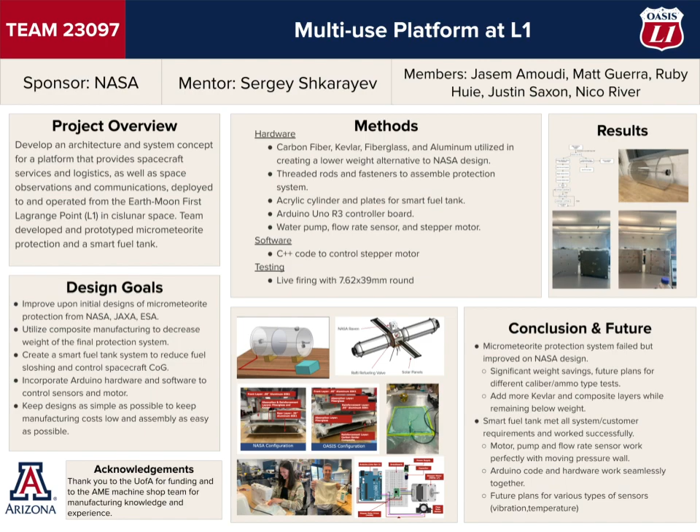Our project focuses on developing an on-orbit refueling station located at the Earth-Moon First Lagrange point, intending to extend the range of interplanetary spacecraft. The station is designed to carry hydrazine and dinitrogen tetroxide to refuel spacecraft mid-mission. The Oasis station is deployable in a singular launch aboard the NASA SLS rocket and is designed for an operational lifespan of 10 years. Oasis will be powered by dual solar arrays, supplying 10 kilowatts of power for the basic operational needs of the unmanned station.

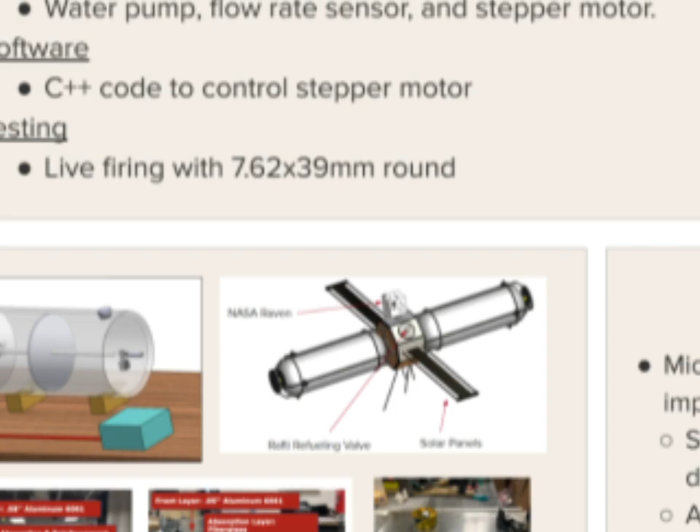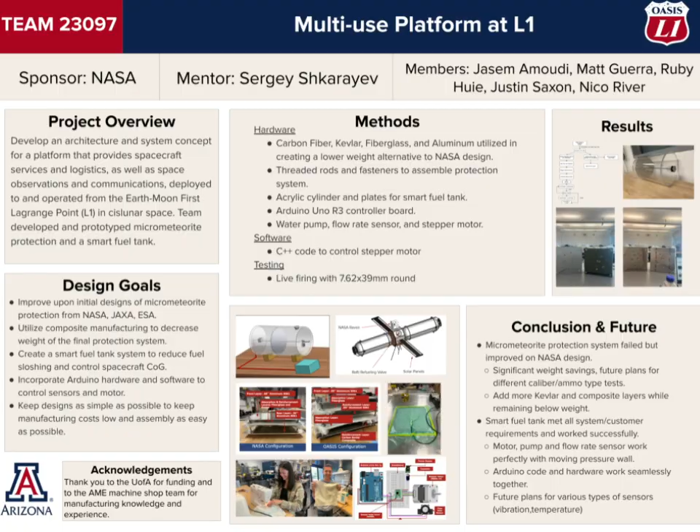Key mission challenges our team identified were the threat of micrometeorites to the fuel tanks, as well as maintaining propellant pressure and station attitude control as the tanks are emptied during fuel transfer. To combat these threats, we prototyped a micrometeorite protection system, improving upon previous NASA designs, and designed an autonomous smart fuel tank to control propellant pressure and create a constant axial moment of inertia even as fuel levels change.

We will next take a closer look at the system requirements for the micrometeorite protection. These requirements can be broken down into 6 categories.

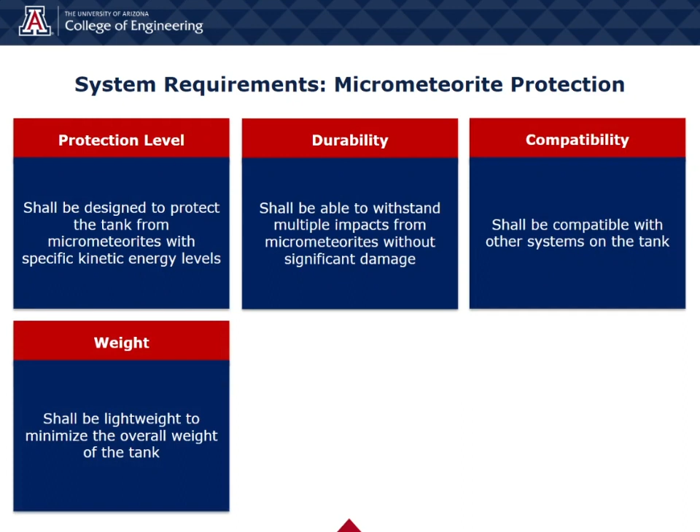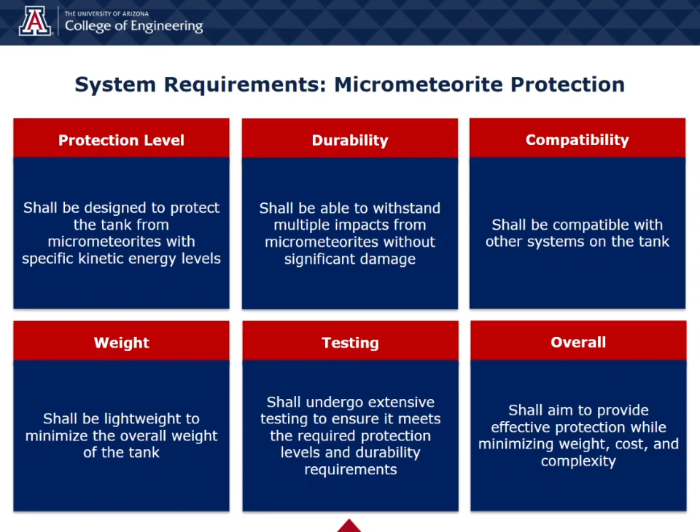The design shall be able to withstand micrometeorite impacts while remaining durable enough to withstand future impacts. The design shall also be compatible with other systems on the tank while remaining lightweight. Thorough testing of the various designs shall also be done to ensure the layers meet our protection and durability requirements. When combined, these different requirements will hopefully lead to an effective protection system while minimizing weight, cost, and complexity.

The system architecture for the micrometeorite protection system was composed of a NASA configuration and our own Oasis configuration. The NASA configuration was composed of a front wall, followed by 2 different types of fabric, and then finally a rear wall. For our design, we had a front wall, a layer of fabric, another wall, another layer of fabric, and then finally a composite rear wall.

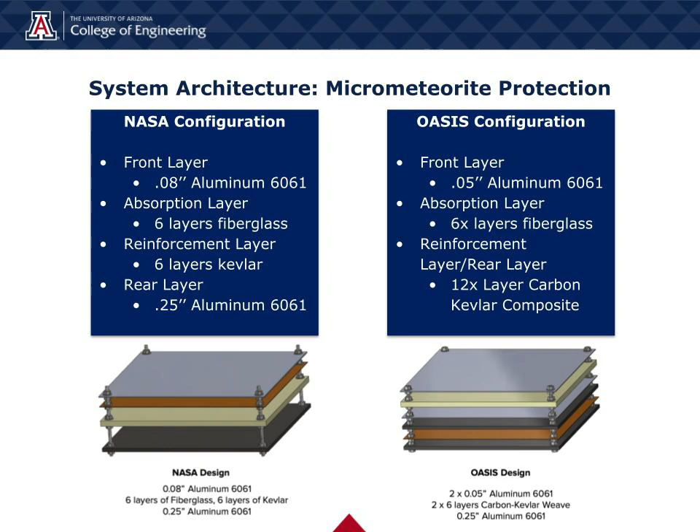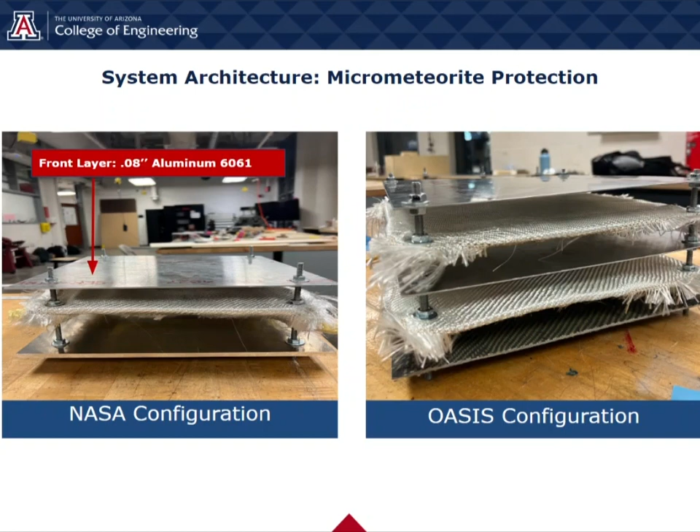Looking in more detail, on the left is our NASA configuration, where the front layer was composed of a 0.08-inch aluminum 6061 alloy, followed by an absorption and reinforcement layer composed of fiberglass and Kevlar, and then finally a rear layer of 1/4-inch aluminum 6061.

For our Oasis configuration, it was very similar, but we used 0.05-inch aluminum for the front wall, followed by 6 layers of fiberglass, another reinforcement layer of 0.05-inch aluminum, followed by another 6 layers of fiberglass, and then finally a reinforcement layer composed of a carbon Kevlar weave.

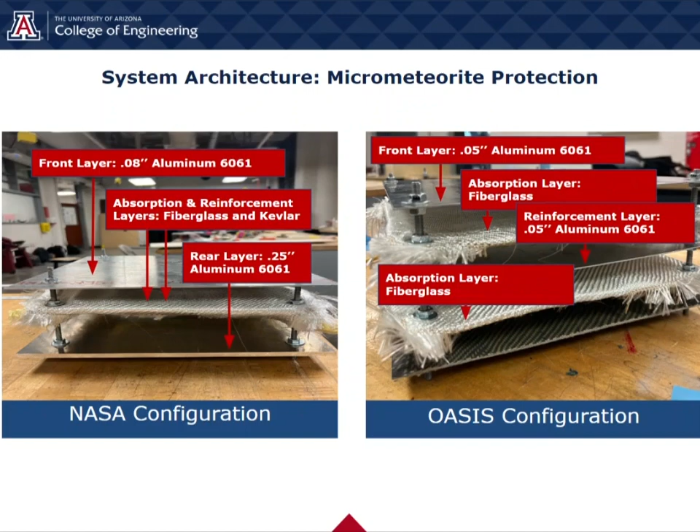To create our configurations, we utilized basic machining techniques on our metal components, and for our material components, we sewed and grommeted the layers after cutting them to size.

The most time-consuming and complex part of the process came from the creation of our carbon Kevlar composite. It was composed of 12 separate layers that were individually saturated with a high-quality epoxy resin. The layers were then stacked together and left to cure for 36 hours inside a vacuum bag, which removed any excess air bubbles present throughout the different layers.

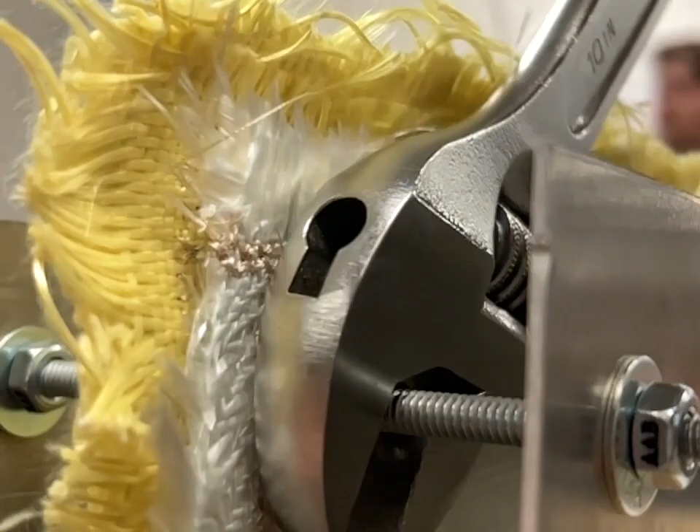After the curing process was complete, we were left with a strong and durable layer that we could add to our protection system. After this was done, we were able to assemble the layers by utilizing threaded rods and a combination of nuts and washers to hold the layers at a desired distance from each other.

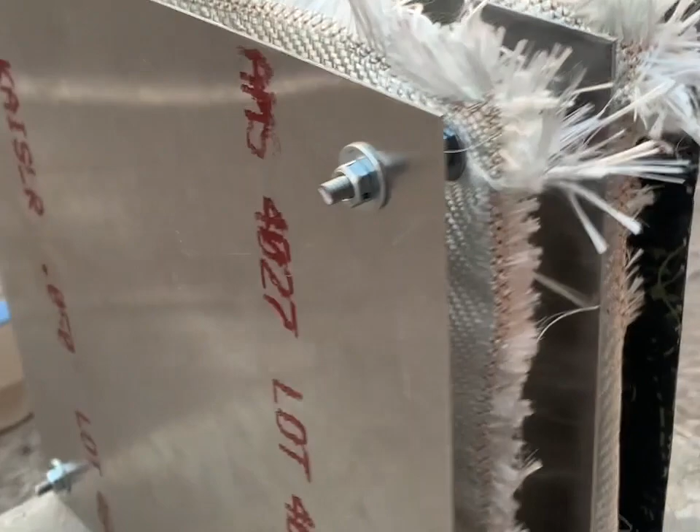The first sample to be shot was our own design. It was shot with 5 7.62 by 39mm bullets at 1900 feet per second and generated a minimal amount of debris. Tracking a piece of debris and measuring the distance it traveled over a certain number of frames allowed us to calculate its velocity. In this case, it was traveling at 12.3 feet per second.

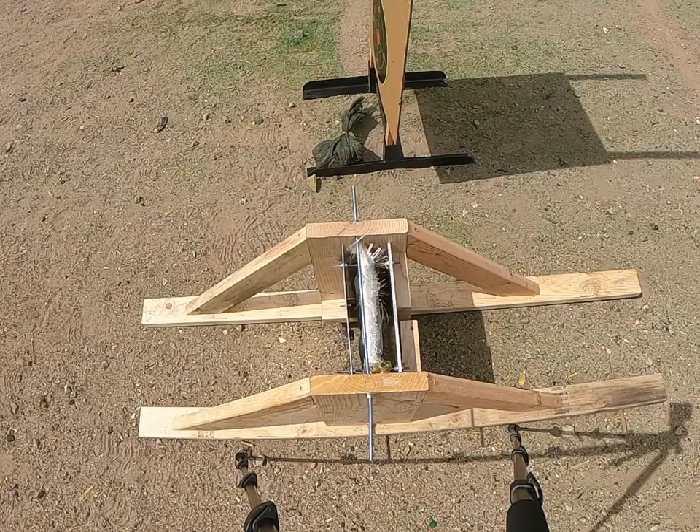Now looking at the NASA design, you can see a lot more debris is being generated. Part of this could be due to the wood being weaker after having been shot, but it is likely due to higher energy in the bullet after going through the layers. Doing the same analysis on the debris generated gave a particle velocity of 16 feet per second, which is 30% higher than in the Oasis design. This leads to the conclusion that despite the layers not stopping the bullet, the Oasis design was better.

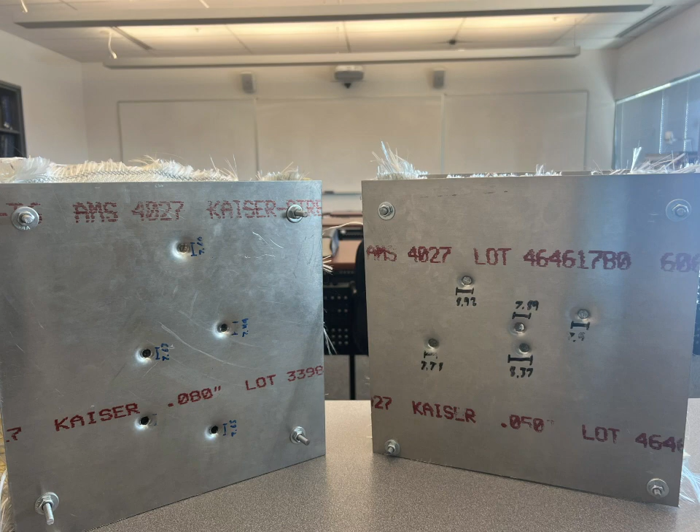The aftermath of our prototype testing can be seen in these images. We're next going to talk about where we went wrong with our prototype testing.

The main issue with our testing is the type of bullet we decided to use. We decided to use a 7.62 by 39mm full metal jacket round, which was chosen because it has a similar amount of energy to a micrometeorite impact. This is a poor choice, however, because it is designed for penetration and does not shatter on impact. For future testing, the use of frangible bullets would have been a better choice, as they are designed to shatter upon impact, more closely emulating what a micrometeorite collision looks like.

Testing our samples in this way would have led to the bullets being completely stopped by our various layers, and allowed us to examine how our configurations actually worked and allowed for a better comparison of the two designs.

Through thorough testing and analysis, we were able to come to three conclusions. First, the Oasis configuration was 30% more energy effective and 40% more weight effective than the NASA configuration. Second, neither configuration provided sufficient protection against high-velocity rounds designed specifically to penetrate through objects. Third, future considerations will take into account the designated uses behind specific types of munitions and more closely try to replicate the types of impacts that micrometeorites have, in order to optimize future configurations.

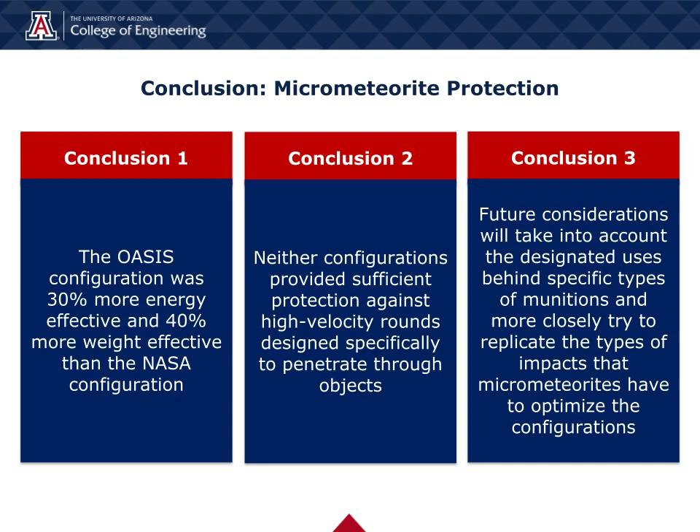The system requirements for the smart tank can be broken down into five categories. Sensors shall be used to monitor different properties of the fuel, which shall provide guidance for how to move the wall, reducing fuel sloshing and maintaining a constant density.

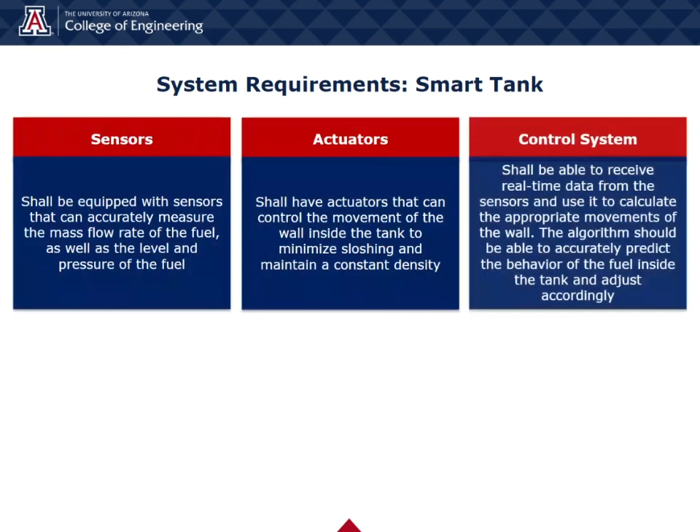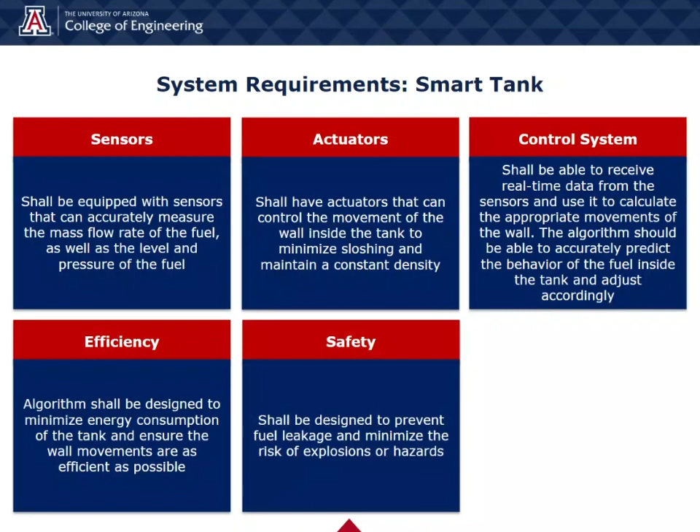The control system that is developed shall be able to accurately predict the behavior of the fuel inside the tank while minimizing energy consumption. It shall also be able to monitor different safety parameters surrounding the tank. Combined, these requirements should lead to a successful tank design.

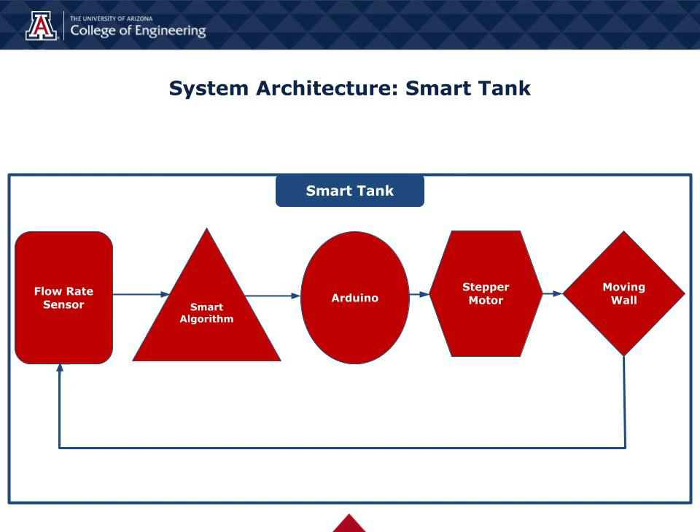The system architecture of the smart tank is as follows. A flow rate sensor sends information about how much water is leaving the tank to a smart algorithm, which can then tell the Arduino how far the wall needs to move. This then tells the stepper motor how long to spin until the moving wall hits the desired distance.

Let's briefly describe the hardware associated with our smart fuel tank design. It starts with the Arduino Uno R3. We also have a stepper motor driver, a flow rate sensor, a NEMA 17 stepper motor, a capacitor, a power supply, and a breadboard.

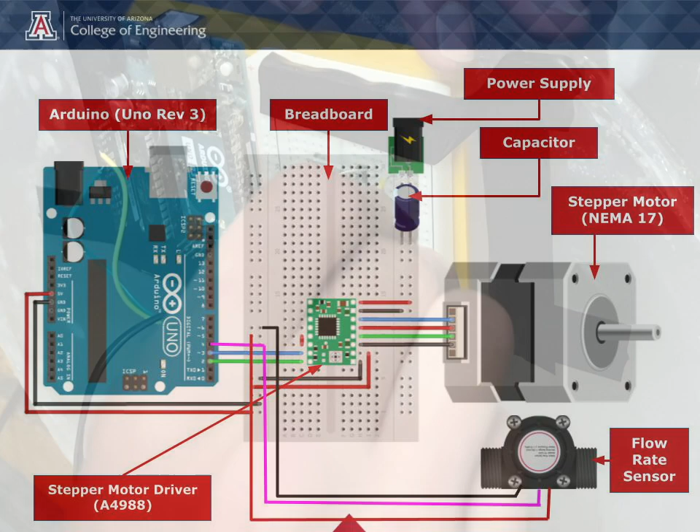When the motor steps, it suddenly demands a lot of current, which can cause the voltage for the Arduino to drop. The capacitor provides a local reservoir of power that can store and supply energy for this demand spike. The stepper motor driver converts pulse signals from the controller into motor motion to achieve precise positioning. A breadboard is an easy way of prototyping a circuit without having to solder everything together.

This will be a brief description of our software through a software block diagram. Like any software development task, all the magic happens within the IDE. This is where the main body of the function is programmed in C++. We then connect our personal computer to the Arduino Uno R3.

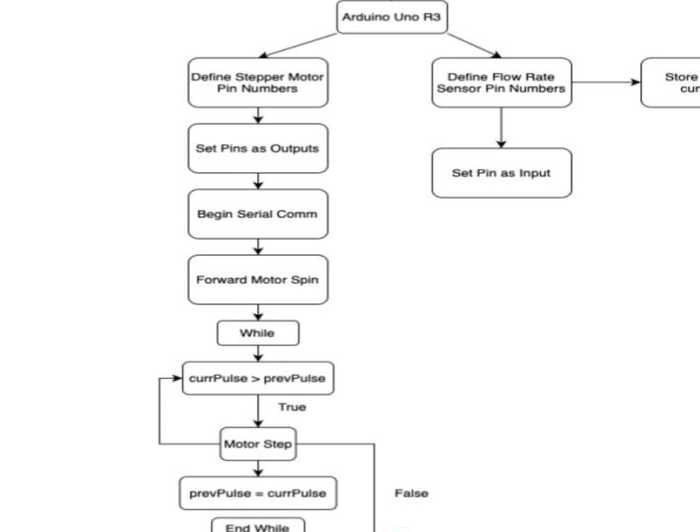We first define our stepper motor pin numbers, as well as defining the flow rate sensor pin numbers. From there, we set pins as outputs, begin serial communication, step the motor forward, and then enter a while loop. In this while loop, the condition is: if current pulse is greater than previous pulse.

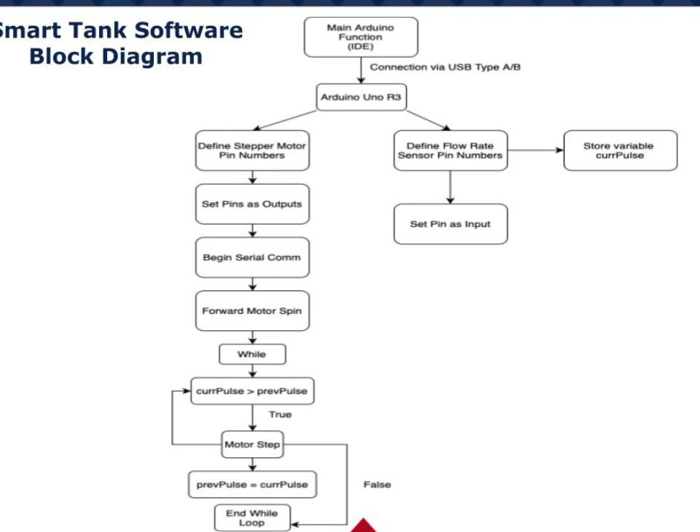If that's true, we step the motor forward. If that's false, we end the while loop. But within the while loop, we set previous pulse equal to current pulse. On the flow rate sensor side of things, we store a variable called current pulse, and we set the pin as input.

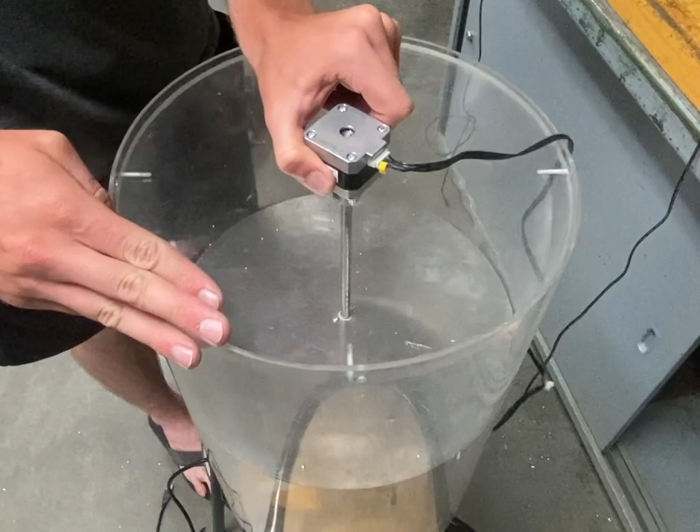Once construction of the tank was completed, it was time to test the algorithm. To simulate fuel transfer, the tank was filled with water. The simulated propellant flow was controlled by a valve at the bottom of the tank, pressurized by gravity. Upon opening the valve to allow water to flow out of the tank, the flow rate sensor trips, telling the stepper motor to begin rotating.

As the motor begins to rotate, the threaded rod mounted to the stepper motor also rotates, allowing an attached plate to be pushed down the tank. The flow rate sensor detects pulses created by magnets attached to turbine blades as liquid flows through the turbine. The time between pulses can then allow for measurement of flow rate magnitude.

Based on the flow rate magnitude, the stepper motor is instructed to increase or decrease rotation speed to match the volumetric change of fluid in the tank, based on a simple conversion between the motor rotation rate and displacement of the pressure barrier within the tank.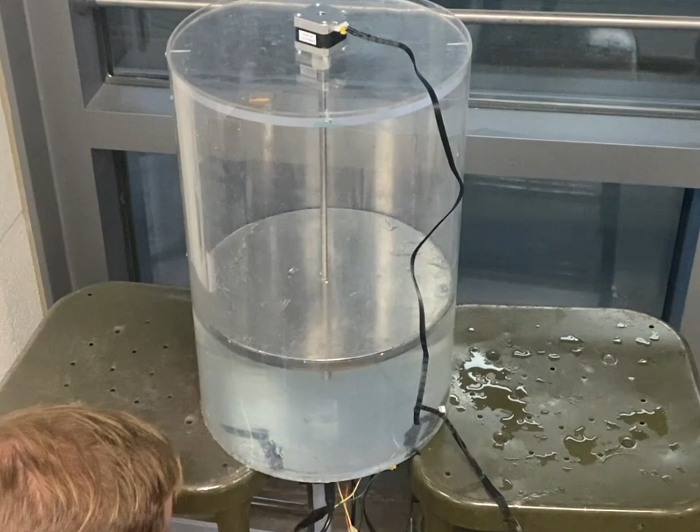As can be seen halfway through testing, the valve is closed. Immediately, the flow rate sensor stops sending pulses to our pulse counter, and the Arduino tells the stepper motor to stop spinning. As soon as flow resumes, the stepper motor autonomously begins rotating and the plate continues to move with the water level.

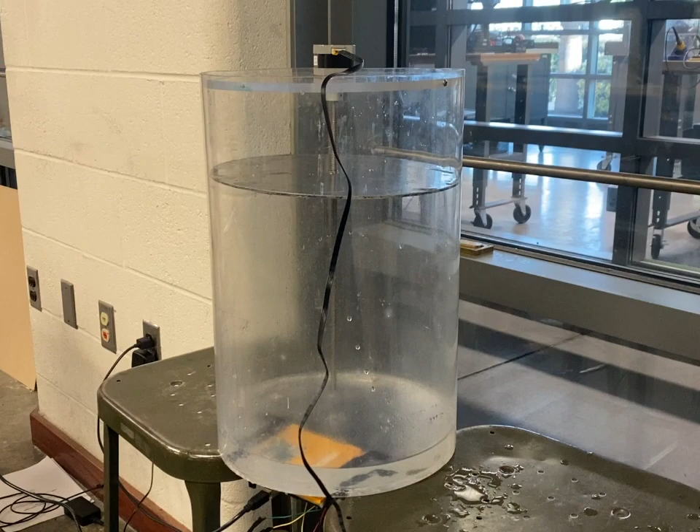Once the tanks have been emptied of propellant, the station allows for refilling using the two-way RAFTI valve. For our prototype, once refilling of the tanks commences, the flow rate sensor re-engages. The Arduino then reverses the motor direction, at which point the pressure barrier begins to move up the tank to allow for the new propellant volume. This reversible process greatly increases the lifetime value provided by Oasis to other patron missions.

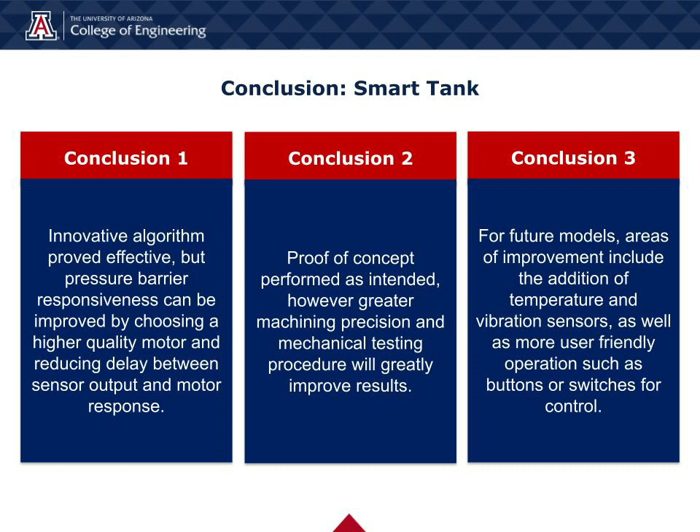Through testing the smart tank, we were able to draw three main conclusions. First, while our algorithm proved effective, the responsiveness of the pressure barrier could be improved by choosing a higher quality motor. Second, while the proof of concept works, having greater machining precision would greatly improve the results. Third, the addition of temperature and vibration sensors would help increase the capabilities of the tank.